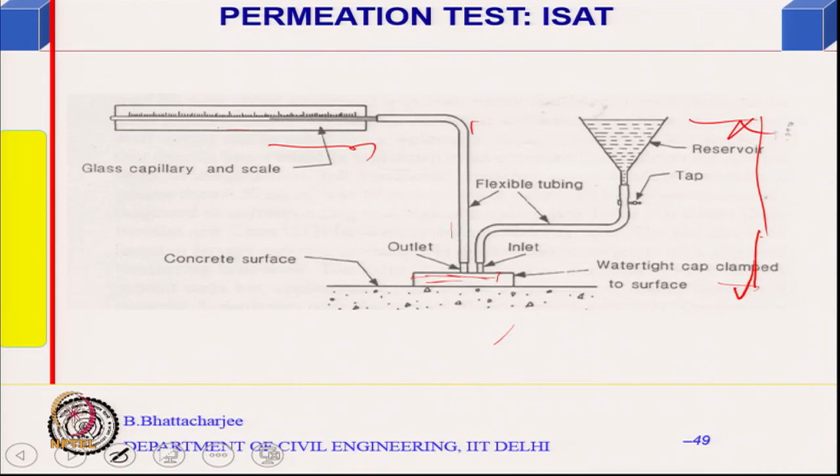Higher this value, concrete is more permeable, in other words it is poorer concrete. All qualitative, no quantitative, nothing you can really say about how long your repair cycle will be, etc. There is something called Figg air permeability test, something called Figg water permeability test. I will describe one of them.

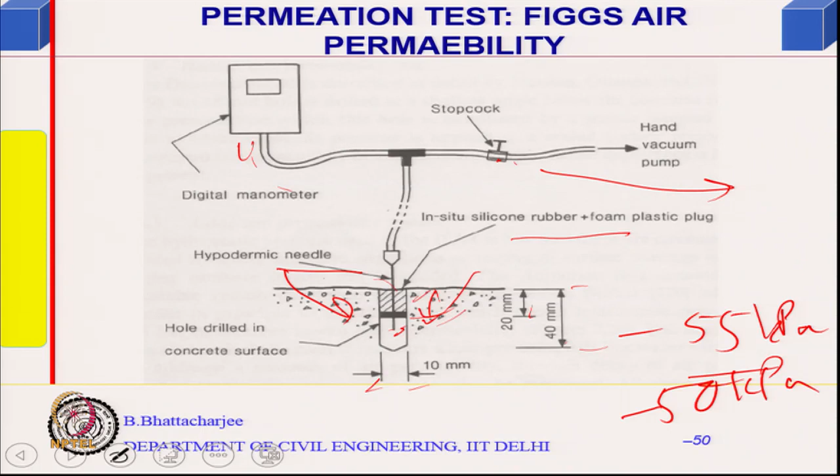Vacuum pump you have stopped at minus 55 kilopascal, and then air will enter through this, and note the time at which it has gone to 50 kilopascal or some such values, over a range. So, if this time is high, it means that concrete is less permeable. If it is low, it means that it is highly permeable. So, again qualitatively you can measure the permeation quality of concrete.

There are many other tests which have come of late, autoclam test, Torrent tests, several of the permeation tests have come, but all give you some qualitative idea. So, if you want to compare one concrete with another concrete, it is possible.

In fact, one of the ideas is that by the side of your structure, you put some concrete specimens, dummies, and from time to time observe them and measure them, and they can be linked to the performance of the structure. So, performance based design, some in situ measurements you can do, but some dummies also you can use, not an easy job, but you can do it in some important structures. So, all these permeation tests, two of them I described.

There is another BS absorption test. What you do? You cut a 75 mm core and put it in an absorption test in distilled water for half an hour in some standardized procedure. The amount of absorption, if it is high, it is a bad concrete, high permeability, moderate permeability and low permeability. So, this way it can be classified. For example,

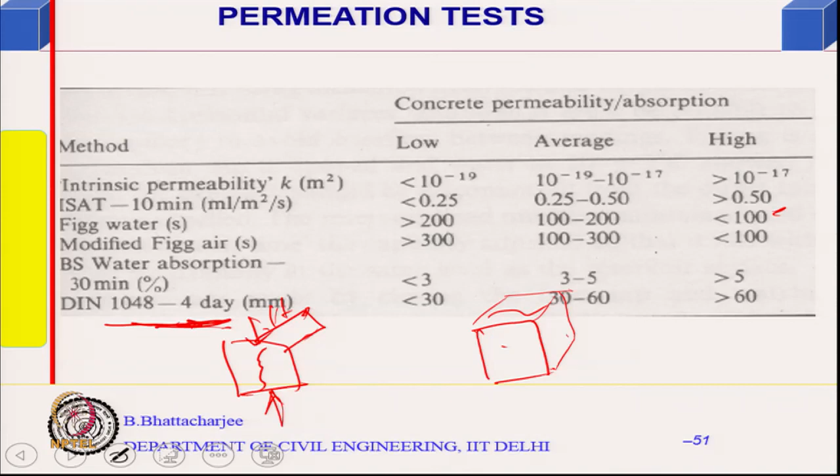So, you split it and find out what is the depth of penetration of water. Now, time of applying this hydraulic head is fixed, amount of hydraulic head is fixed, so the depth of penetration is a measure of permeability. It is finished in 3 days, something of that order. It is given as a 4 day test, in millimeters, DIN 1048, I think.

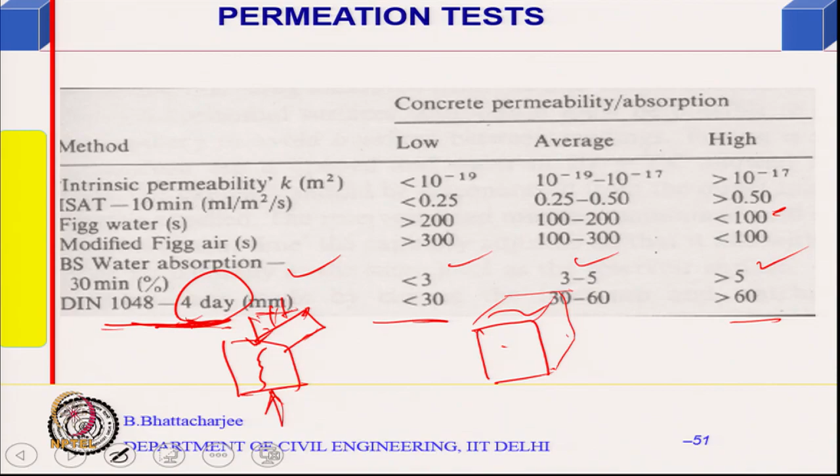The German codes give you this. Less than 30 is good, more than 60 is highly permeable. BS water absorption test: less than 3%, 3 to 5%, greater than 5% is bad. And modified Figg air permeability, which I showed, I have used at site sometimes, because it is simple. With the core, you take out a core, so it is semi-destructive, you can say. ISAT also we have used at site.

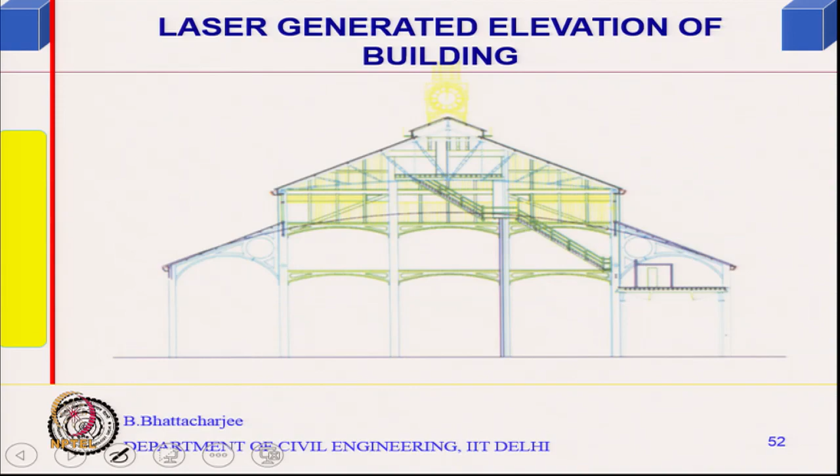So, using laser, for steel structure one can actually totally obtain it. So, these are some of the non-destructive tests and other tests involved in condition assessment of building structures and even finding out the repair cycle in some cases. One of the advanced areas is structural health monitoring, which uses different kinds of sensing. Sometimes they measure the response to dynamic load and find out how the stiffnesses are changing. Those are more mechanical, damage detection related. Many look into mechanical aspects, but deterioration is where the maintenance is.

Damages you can determine by various techniques, but deterioration structural health monitoring cannot tell you at the moment, because transducers are not available for deterioration measurement. If damage has occurred, let us say due to earthquake, possibly stiffness would change, cracks have come. Damage is different than deterioration. Deterioration is a gradual process. Damage is due to loads. People use these synonymously, that is not correct. Retrofitting, rehabilitation, repair are not the same thing. Similarly, damage and deterioration are different issues.

Long term deterioration can lead to damage, but damages usually come quickly during accidental overloading, earthquake. Sometimes fatigue damage could be there over a long period of time where stress reversal is there. So, that is related to this. Now, we will look into some strategies. As I said, people muddle up the definitions of repair, rehabilitation and retrofit. I might have given you once, but let me repeat it.

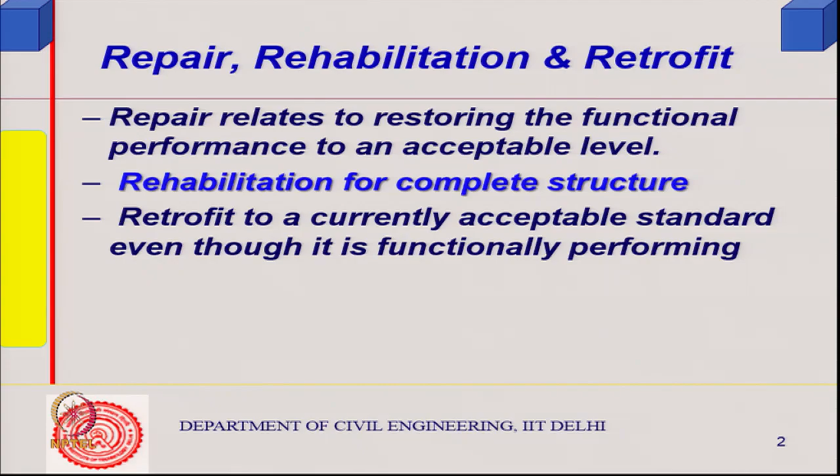An example in structural scenarios is that seismic risk perception has changed, not really anything else. So, you think you should strengthen it, increase capacity, or improve detailing. Sometimes strengthening is required if you find the actual structure is weaker than it should be. So, repair, retrofit, rehabilitation and strengthening. Strengthening may be a part of retrofit as well as rehabilitation.

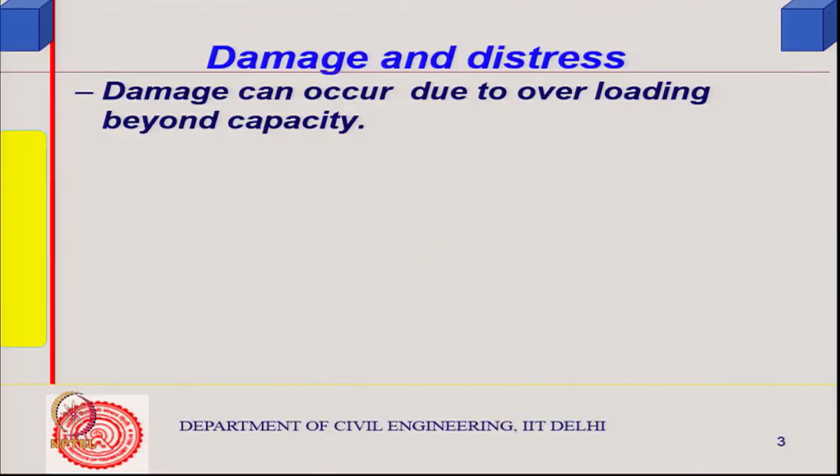Then some more definitions. Damage can occur due to loading beyond capacity. Damage or distress can occur due to deterioration or degradation of material leading to serviceability limit failure, right. So, this can occur over a long period of time. So, most often degradation of material does not lead to collapse, but you need maintenance. The cost of maintenance would be there.

So, sometimes people get really scared. For example, you find a crack at the parapet level, between the parapet and the slab level of the roof, or the rooftop level where the parapet starts. You find a horizontal crack. People get scared. Is the building going to collapse? Perhaps not.

Similarly, if you see corrosion cracks, one rebar or a couple of rebars showing signs of corrosion cracking, it does not mean that the structure will immediately collapse. If you do not attend to them, then it will collapse. So, you have a lot of time available here, and therefore, this is related to maintenance, more rather maintenance than a collapse scenario, right. So, this is what it is.

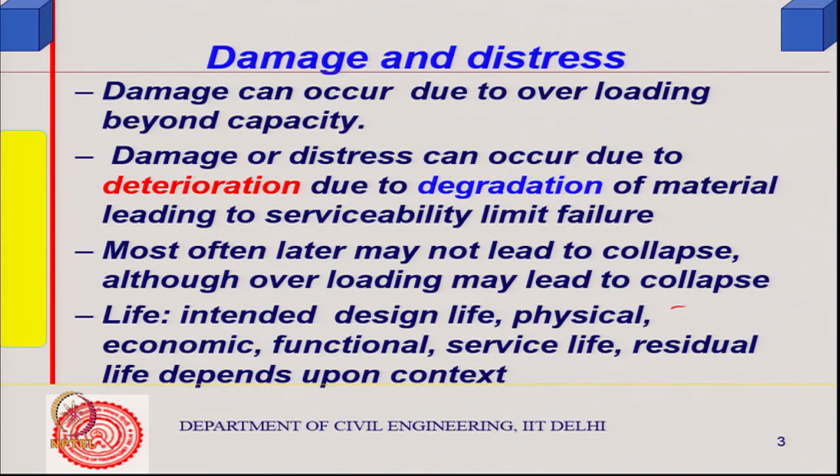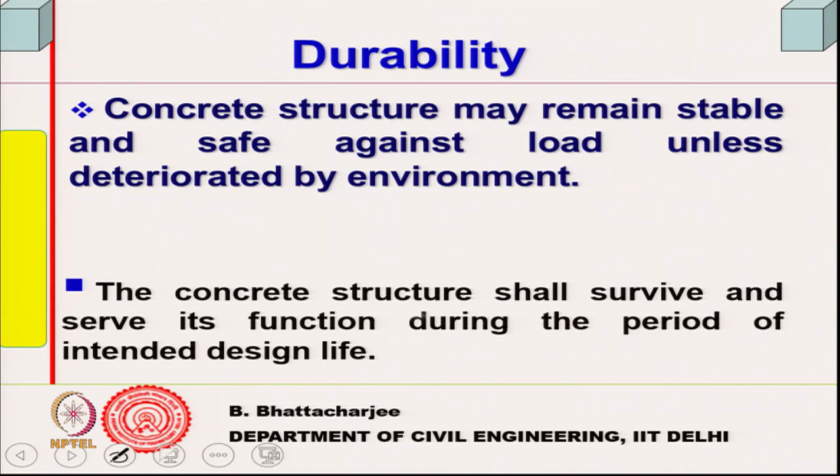Did I define the life before? So, life we have already defined. Now, the deterioration etc. is related to durability. Concrete structures should perform safely unless deteriorated by the environment. Durability is related to deterioration, and the structure shall survive and serve the function during the period of intended design life. That is what we have seen earlier also. So, you might need periodic and occasional maintenance, and some strategy has to be defined with regard to this.

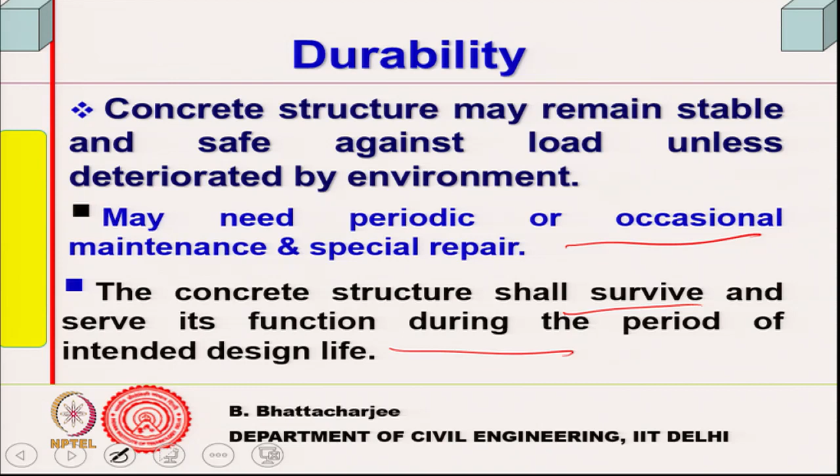We have looked into non-destructive testing, and we have also seen the importance of inspection in case of other components of buildings. If you look at structural elements, then also we have this issue. So, let us define durability first. Durability is its capability to maintain a minimum performance level for a specified period of time in a given environment where you have exposed it. It must show functional performance, whatever it is supposed to do. If it is supposed to carry load, it should be able to carry the load; load performance is one of them, and there could be other performances as well.

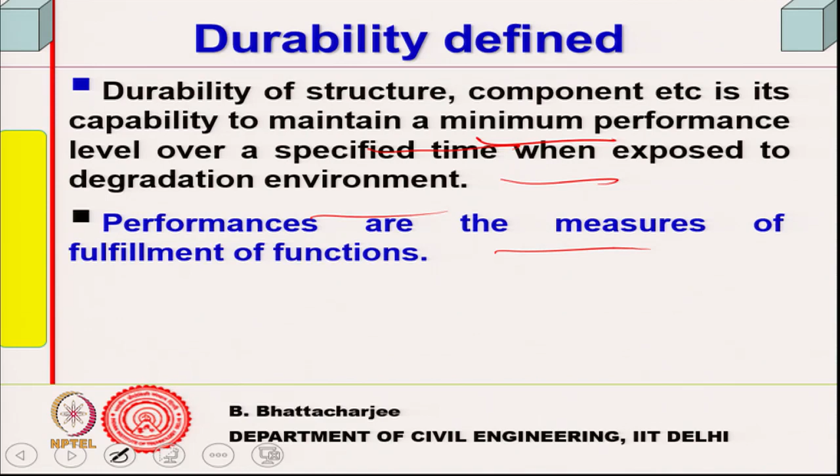So, deterioration and degradation is related to durability in this manner. It is the capability to maintain minimum performance for a given period of time in a given environment where deterioration can occur. Performances are measures of the fulfillment of functions, whatever it could be, and performance varies with time. Deterioration is the gradual decrease of performance with time.

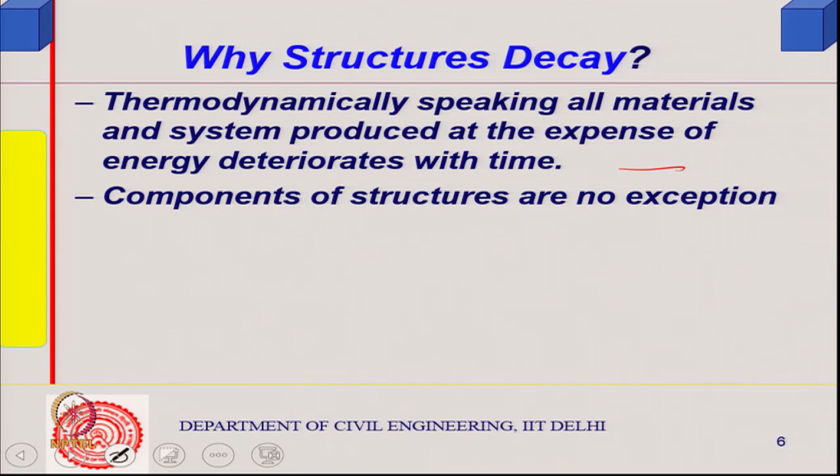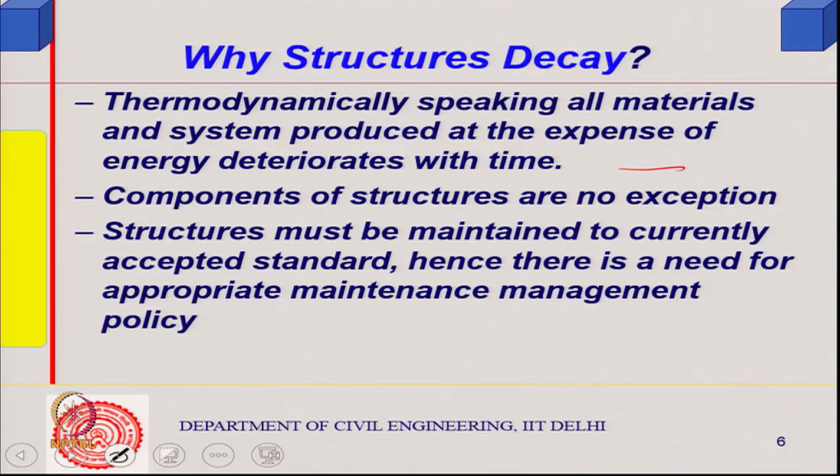Now, structures or materials will decay because they are man-made, produced at the expense of energy. They are not at a stable minimum chemical potential level. So, all material systems produced at the expense of energy will deteriorate. So is the case of structures, and therefore, you must maintain them to currently accepted standards. Hence, there is a need for appropriate maintenance management policy. I think we defined service life earlier. So, we have to write a maintenance strategy.

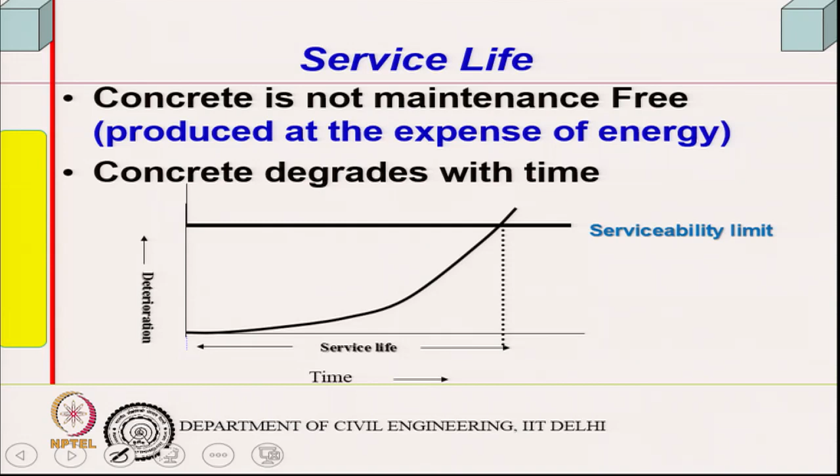Once you have repaired, the deterioration process will slow down and it will reach the intended design life. In fact, you should have a maintenance-free intended design life of the structures, because maintenance does cause a lot of disruption cost and discomfort. If something is cracked, people do not feel very comfortable about it, and you have to repair; the cost involved is too high. So, all these issues are there.

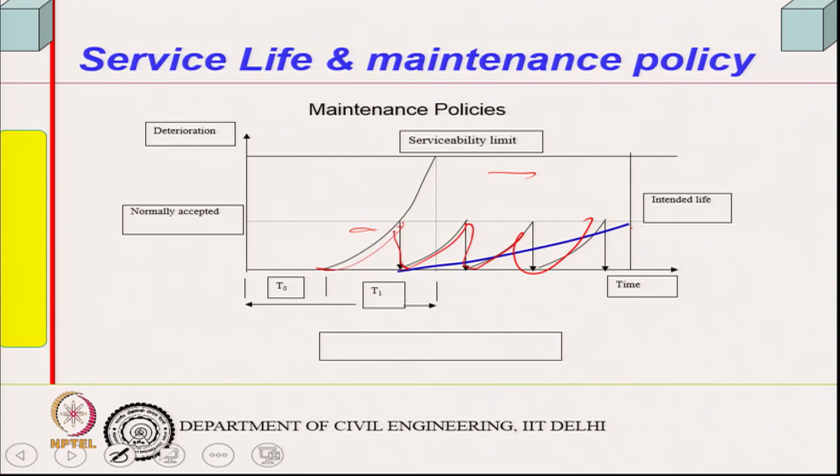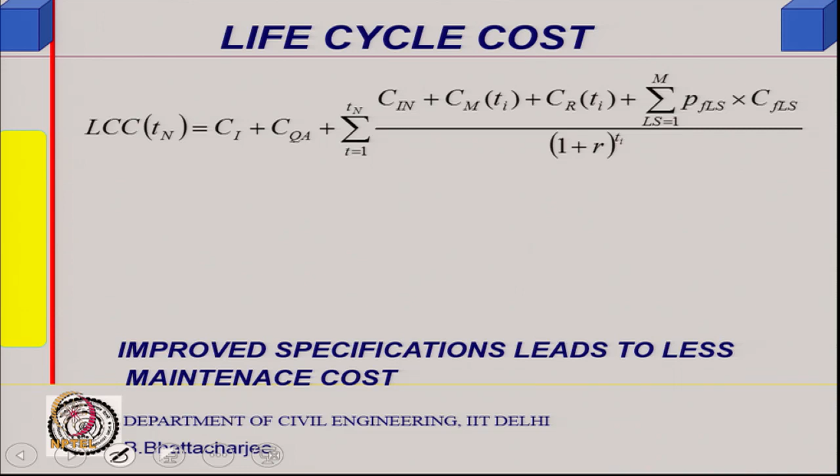Now, this can still happen because to truly, 100% envisage the deterioration environment is not very easy. So, if there is deterioration occurring, you repair it in such a manner that it goes up to the end, that is the idea. Now, in such situations, we have already looked into life cycle cost, but here this is slightly more elaborate, I believe, than the equation that I gave you earlier.

So, there is an initial cost, which is more important for various kinds of structures. Now, there is a cost related to quality assurance, which could be different for different levels of quality control. So, it is the pure initial cost. Construction quality assurance cost is something like this, which occurs in the beginning. This is all in present worth form. Now, these costs are inspection costs.

So, you have to do periodic inspection, that is what we have seen in case of other components of building, right. So, inspection cost, then there is a maintenance cost, and then you can associate with the probability of failure, serviceability limit failure probability, and then cost of serviceability limit failure. The probability of failure in first year, second year or 5th year, 10th year, etc., others should be 0 anyway, and you can multiply this.

So, this is the probability P, PfLS is the probability of doing the repair, which we have seen in case of buildings, roof covering and things like that; all of them will not be done at the same time. So, even structural elements, if there is a possibility of deterioration, out of 100 only 20 structures showed problem. So, probabilities can be associated in this manner, and then this is the interest rate and time. So, R is the interest rate, Ti is that particular year, i going from 1 to n for all n years.

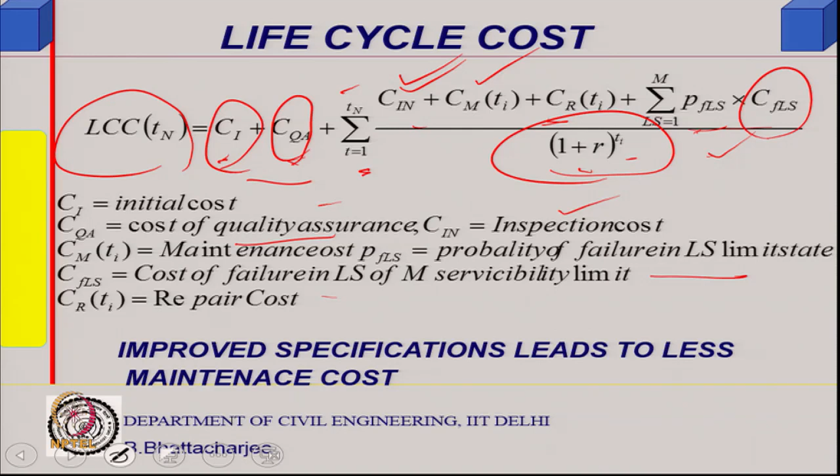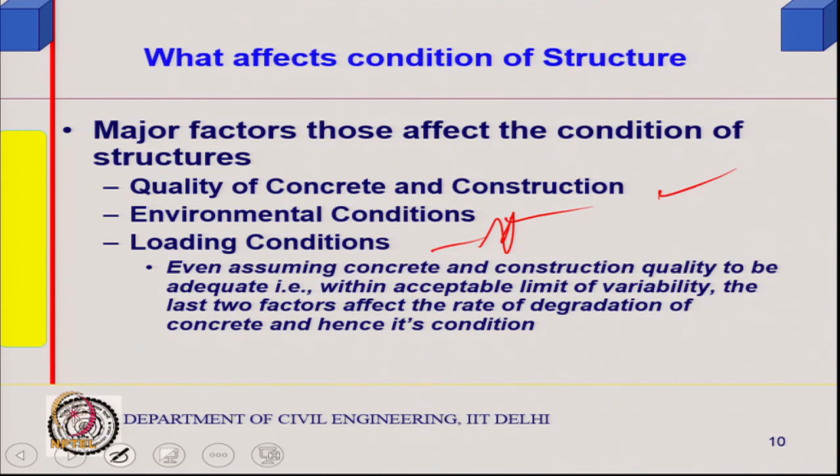So, generally inspection is a must. What I am trying to show here is that a good system of maintenance would involve inspection, right. So, inspection is a must. Now, obviously, the quality is very important, that is what we have seen so far. Environmental condition and loading condition are also important. Loading condition is important, because fatigue loading would be more susceptible to damages rather than where you have static load. So, the last two factors are too important, environmental condition and loading conditions, right. Even if this is good, one must look into this.

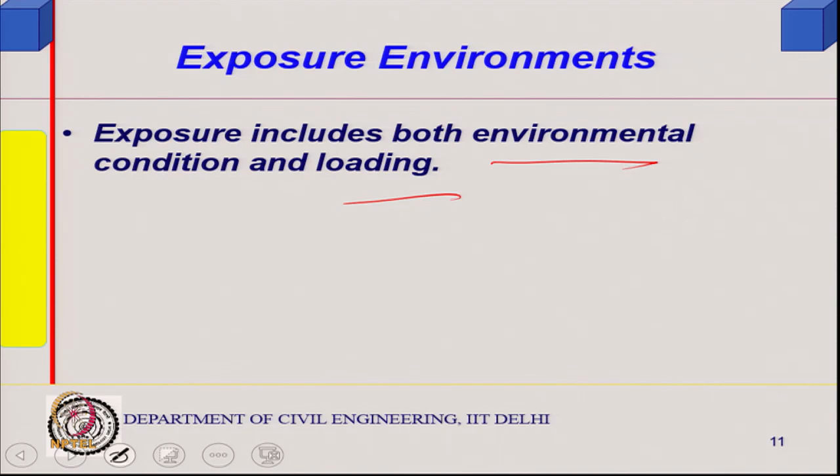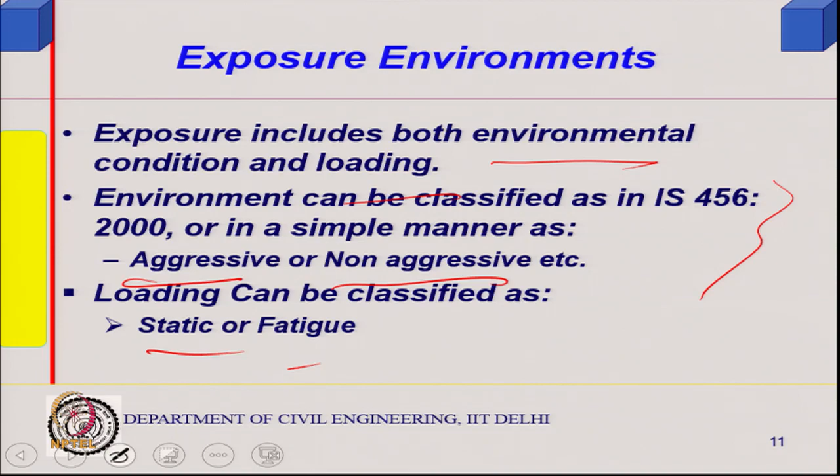So, exposure environment should include both environmental and loading, because loading environment is important. Well, things like IS 456 or the prescriptive ones take care of durability in the beginning. But when you are looking at inspection, we simply classify them as aggressive and non-aggressive environment, and loading as static and fatigue, because the fatigue could be more dangerous. So, you think in terms of exposure environment considering both loading and environment. If it is aggressive environment with cyclic loading or fatigue, then I call it very severe. If it is aggressive environment with static loading or non-aggressive environment with cyclic loading, then I call it severe, and normal means non-aggressive environment with static loading.

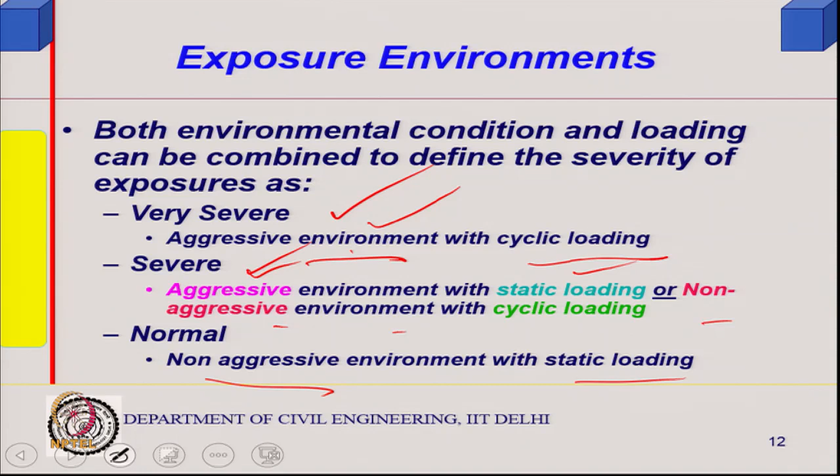So, which are actually aggressive environments? Supposing I have a thermal power plant in a coastal area, there are one or two in Gujarat, right. Or some factories, for example, the Ambuja cement factory is almost on the seashore. Very close to the sea, the chloride can come by movement of aerosol and actually accelerate the process of rebar corrosion. So, this is definitely an aggressive environment, or where wetting and drying is occurring, right. Non-aggressive would be where these kinds of situations are not there. Cyclic loading is well understood, stress reversal is there.

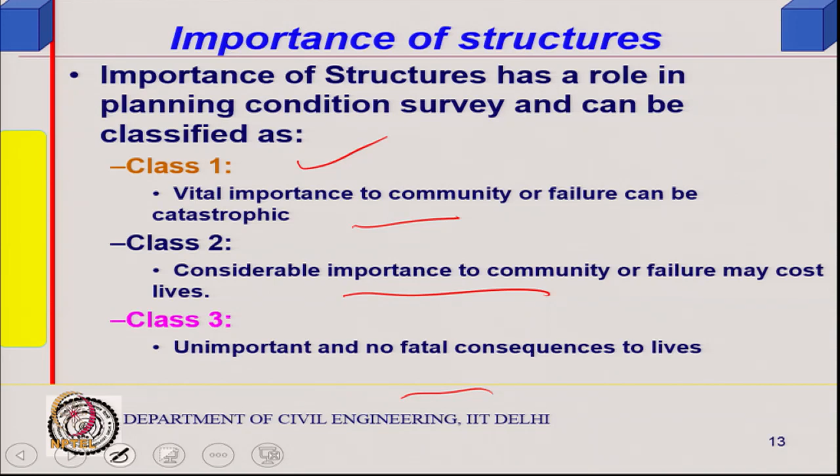So, if it is a class 1 type of structure, you must do inspection every 2 years if it is in very severe conditions, like the example I was giving, thermal power plants close to the seashore, or all over the coastal areas of the country, or something similar, because damage can also stop the power supply to many places. So, that kind of situation, even it could be major bridges, strategic bridges.

So, for example, there was only one bridge in the 1962 war, the 62-65 war I think, between north of Assam and south of Assam, Saraighat Setu, he knows about that. Over the Brahmaputra. So, there is only one and it has to be protected. If you do not protect it, part of it gets disconnected, no supply to those areas. So, that is very strategic.

So, maybe now there are many more, but all of them are actually class 1 type. Bridges, usually long bridges, are class 1 type, because they can cause a lot of damage; that decision has to be made. Then class 2 are some sort of community halls and things like that, structures which are of considerable importance, may cost lives. One has to make decisions related to this, which one you want to classify, how important. Nuclear reactors will automatically fall into those.

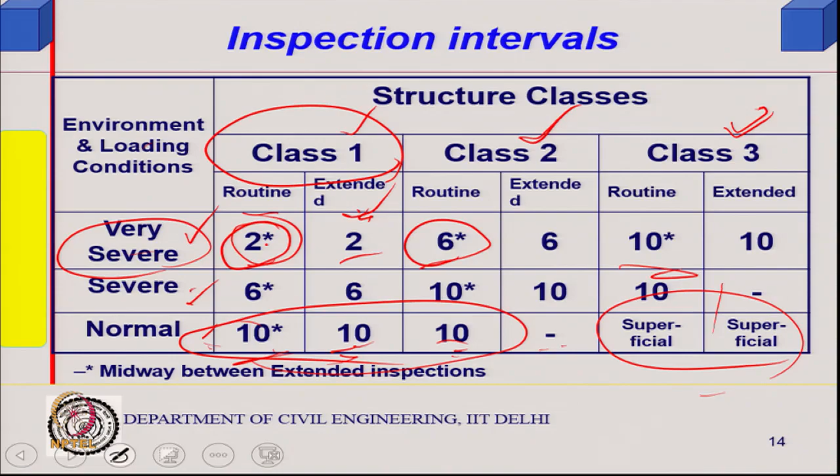If it is class 2, 6 years, that means every 3 years you will do something. Once routine, 3 years later you do extended, again 3 years later. So, in between you just do routine between 2 extended cases. And if it is class 3, not so important structures, 10 years. And if you come down this way, you do not do anything, superficially you look at it. And in a normal, not severe, environment, this is 10, 10, that means every 5 years you will be doing something, and here you do not have to do anything. So, this could be a suggested strategy by experts, European experts actually, and one can follow this kind of strategy.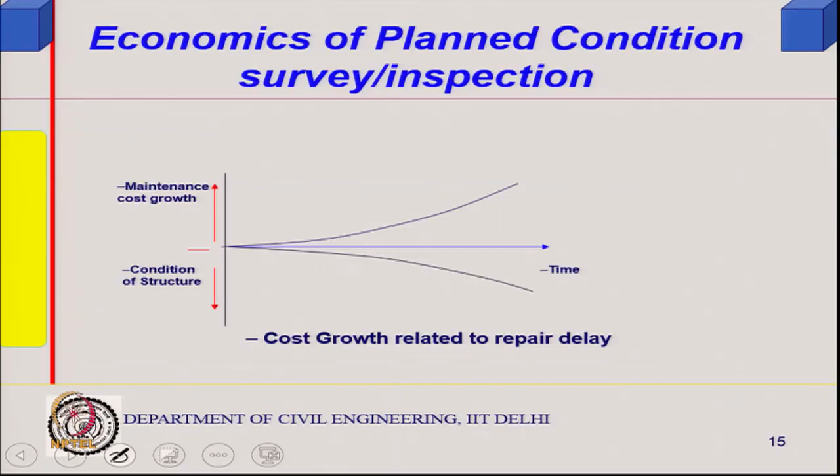Quantifying and modeling them is not easy, then you need to know the deterioration rate, which is still a grey area of our research. Because you remember the economics I talked about, cost growth and damages are like this. So, repair cost increases with time in a non-linear manner, and timely survey and inspection can result in saving.

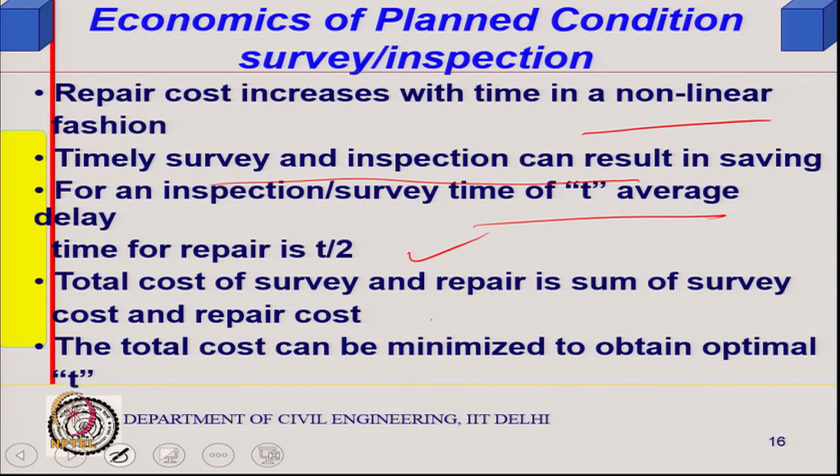So, if you are doing inspection every T years, average repair time will be T by 2, it will not be more than that, because either the deterioration started yesterday and you picked it up today, or you did the inspection today and it starts tomorrow. So, on average one can think in terms of T by 2. One can minimize the total cost of survey and repair, but I will not go into that model. That kind of model would need finding out the rate of deterioration.

So, inspection cost increases in this manner, repair and disruption cost will decrease. There is an optimal point, but quantifying how much deterioration will occur at what time is still a challenge. If you know that, then you can easily model this, and do total cost minimization. Continuous monitoring is nothing but a special case where my inspection time is 0. I am monitoring continuously, so T equals 0.